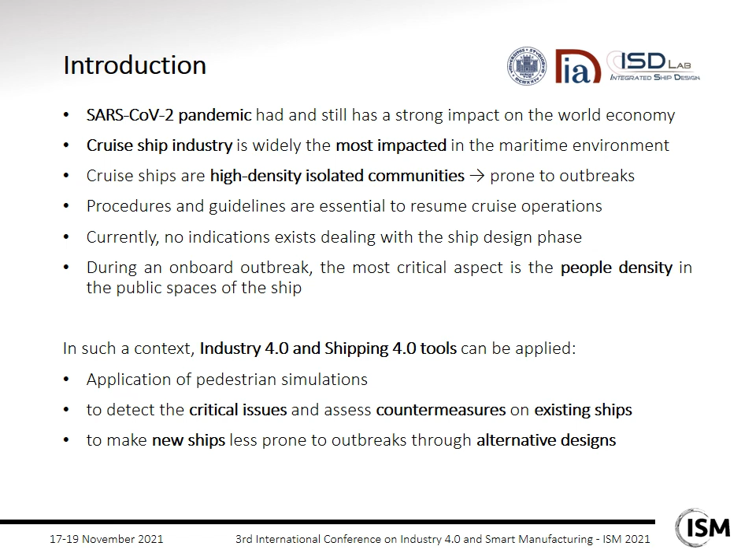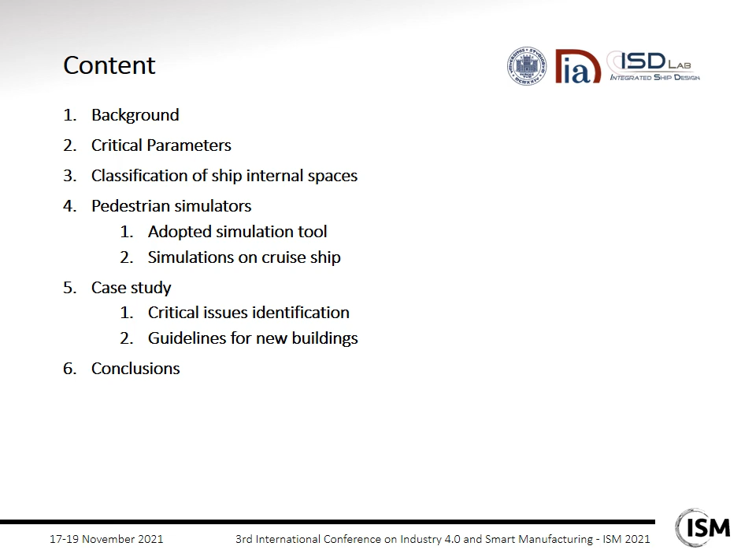This presentation will start from the background represented by current guidelines for cruise operations, then critical parameters affecting an onboard outbreak will be presented and used to define a classification of ship internal spaces. Then the pedestrian simulation tool will be introduced, as well as the process for its usage in the maritime environment. Finally, the process will be applied on a large cruise vessel, gaining some conclusions.

After the no-sail order, national and international organizations immediately started the development of guidelines for a safe recovery of cruise operations. Measures can be classified into two main categories: pre-cruise preventive measures and onboard measures.

The pre-cruise preventive measures are applied before ship departure. First, a risk assessment should be carried out and the preventive measures should be customized according to the current pandemic situation and passenger origin. It might be necessary to reduce the ship capacity and to arrange a segregated quarantine area.

The crew should be trained considering the new procedures and regulations applied on board. Crew should be divided according to their mansion and risk level of exposure to the virus. All the persons engaged in international voyages should be informed about the preventive measures and consent to the health status monitoring. Finally, the access on board should be limited.

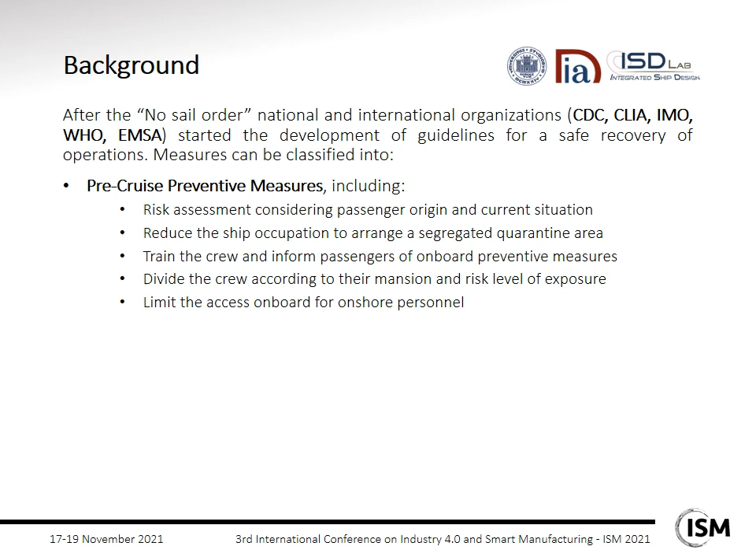The onboard preventive measures and outbreak control include social distancing, public space management, cleaning and sanitizing, management of air conditioning systems, management, preparation and serving of food, use of personal protective equipment, and managing of a suspected case.

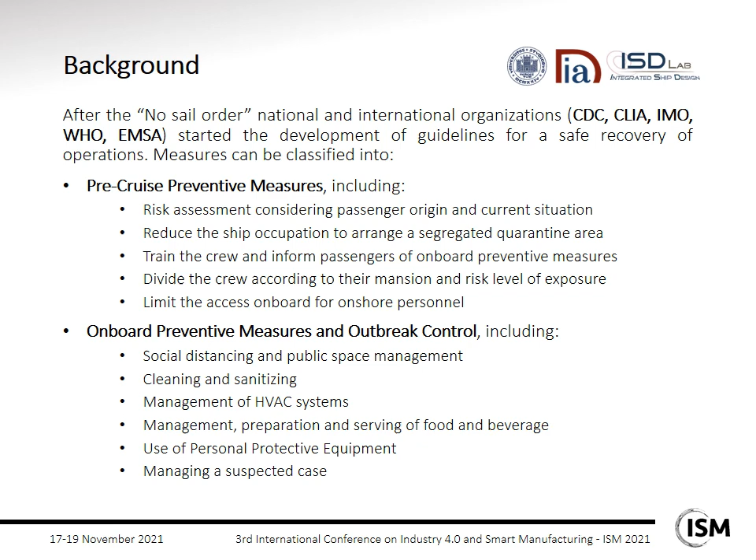COVID infection can spread on board in three main ways: direct contact with persons, contact with infected surfaces, and air conditioning systems, although this last mode has been questioned by some recent studies. According to recent experience and the recommendations, the most important parameters that can foster an outbreak on a passenger vessel are the following. First, the density of persons. In fact, overcrowding is the main source of direct contact.

So, the American CDC prescribed a minimum distance among persons equal to 1.83 meters. It leads to a maximum allowable density of 0.38 persons per square meter. The second parameter is proximity, which considers the type of activity carried out within a specific internal space. For instance, while eating, you cannot wear masks, and this increases the infection risk due to proximity.

Then, there is aggregation, which accounts for the number of persons involved in an activity and their contact level. For instance, aggregation in cabins or shops will be considerably smaller than in a swimming pool or in a theater. The layout of internal spaces also has an influence on outbreaks, since it changes the personal behavior and movements between different ship's areas. It is designed according to several safety criteria, considering evacuation, firefighting, but currently not outbreak control.

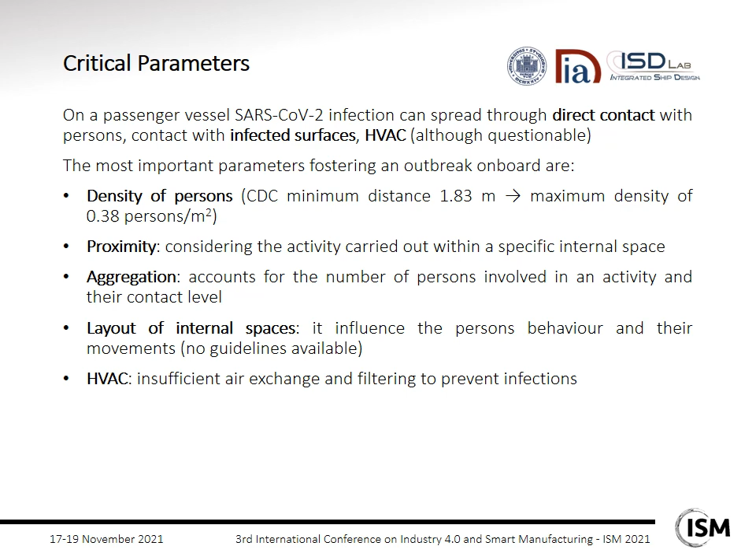Considering the critical parameters, here a classification of ship internal spaces has been proposed. 3 levels have been defined: low exposure risk, highlighted by green color, medium exposure risk in yellow, high exposure risk in red. The parameters driving to this classification are summarized in the table. In the low-risk areas, there is no frequent interaction among passengers and between passengers and crew. Therefore, low-risk areas are mainly identified as stairs, corridors, and cabins.

Medium-risk areas differ from the low-risk ones mainly due to the higher density, proximity, and/or aggregation. Hence, the main spaces classified so are public spaces such as restaurants, bars, casinos, theaters, then service spaces, lobbies, restrooms, and elevators.

Finally, high-risk areas are the ones where interaction with suspected or positive cases occurs. In normal operations, only the medical zone is classified this way, but during an outbreak it might be insufficient, and an additional quarantine area should be fitted and segregated from the rest of the ship. This classification is important in order to apply the proper countermeasures in different parts of the ship, which impact also the setup of pedestrian simulations.

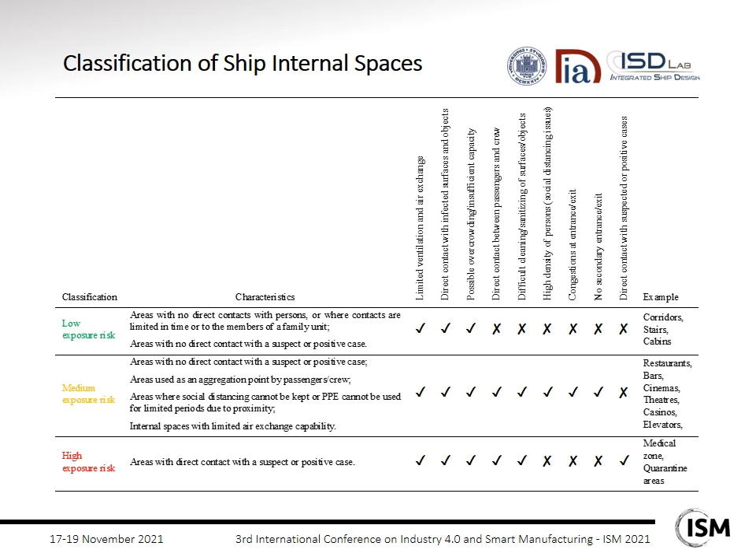Simulation is one of the key enabling technologies in the framework of Industry 4.0. In this work, Legion Pedestrian Simulation tool has been applied to the maritime environment. Legion has been developed for the infrastructure design to simulate the movements of persons inside limited spaces, such as stadiums, squares, city centers, expos, and so on.

It is based on an intelligent agent approach to modeling pedestrian behavior. Simulations are carried out within microscopic models defined with CAD tools. Models include obstacles, ingress and egress points. A so-called origin-destination matrix defines the start and the final point for each agent, which moves between them according to the minimum effort principle, while interacting with the environment and with the other agents.

Agent actions and paths can be customized by behavioral models. Typical examples are the definition of waiting spots and the definitions of specific paths. Considering outbreaks problem, pedestrian simulation can provide very useful information, such as maximum cumulative density of the crowd, level of service of the analyzed space, mean velocity and time of ingress-egress. In Legion, it is also possible to evaluate the maximum capacity of a space in order to assure social distancing.

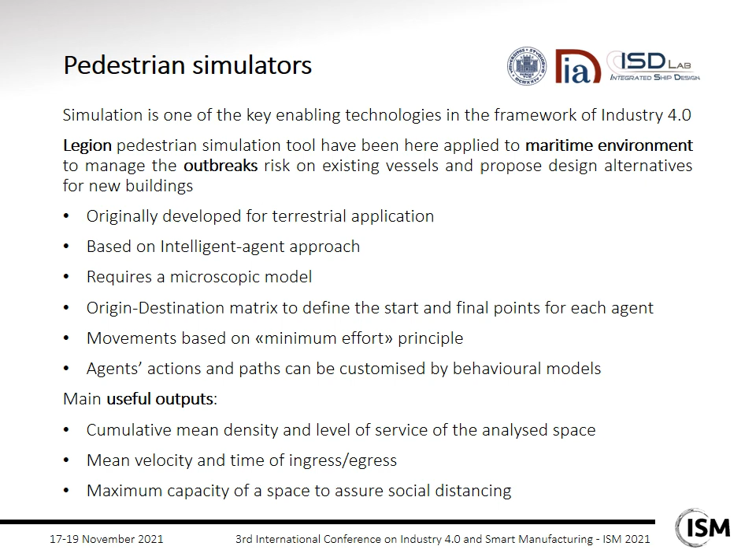In detail, person profiles can be defined according to the standard population defined by IMO for evacuation simulations. OD matrices should be also built up. Origin can be defined according to the day case described in the FSS code issued by IMO. Details can be retrieved by the escape plan of the ship. Destinations are more difficult to define, especially in the design phase, so specific assumptions are required, possibly based on the shipowner's previous experience.

Additional actions or specific paths can be defined for a specific agent or group to better reproduce the activities of the people on board. Then, the simulations can be carried out and the results analyzed. If they do not highlight critical issues, the process can be stopped. Otherwise, alternative measures based on different simulation controls or alternative layouts can be again simulated until a satisfactory result is obtained.

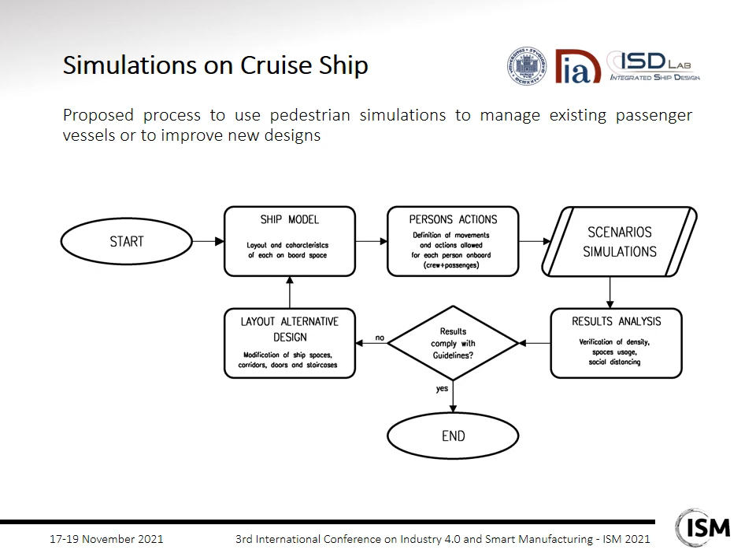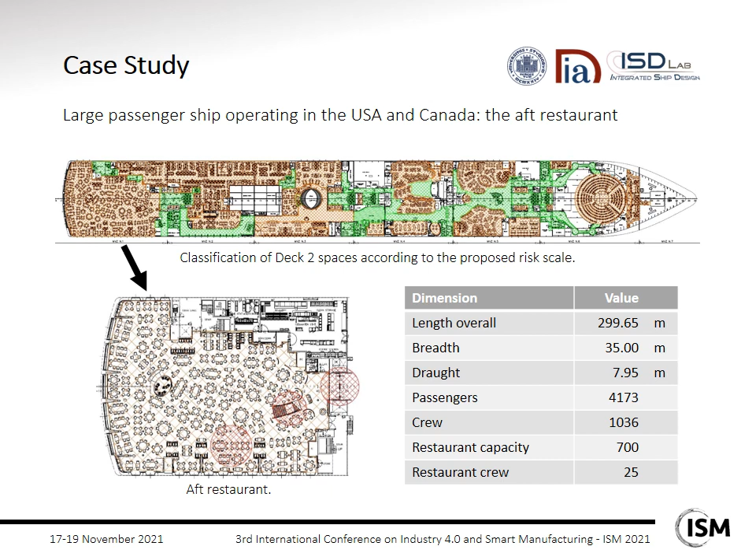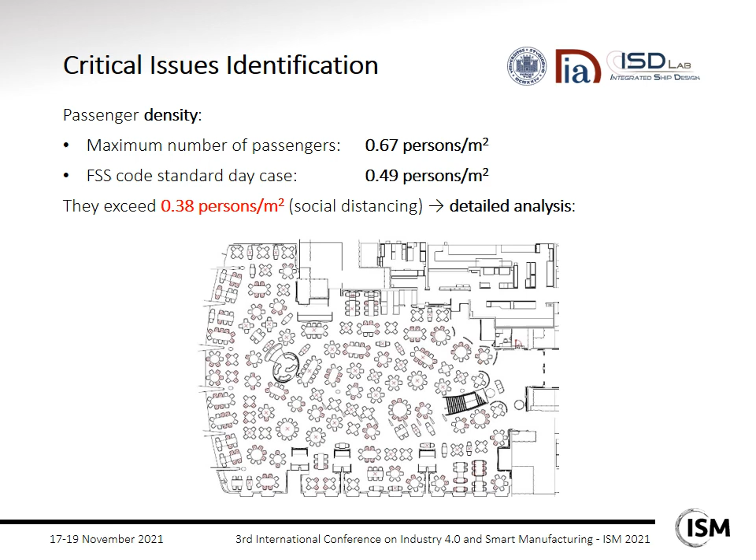The first issue identified is related to passenger density. Applying the maximum number of passengers, as well as the one related to FSS code, the density exceeds the limits issued by CDC. Moreover, to reduce the proximity risk, social distancing should be applied. So, all the seats exceeding 4 per table have been removed. Besides, all the seats located at less than 1.83 meters have been removed as well. It results in a strong capacity reduction. The maximum number of passengers is now 287 instead of the initial 700.

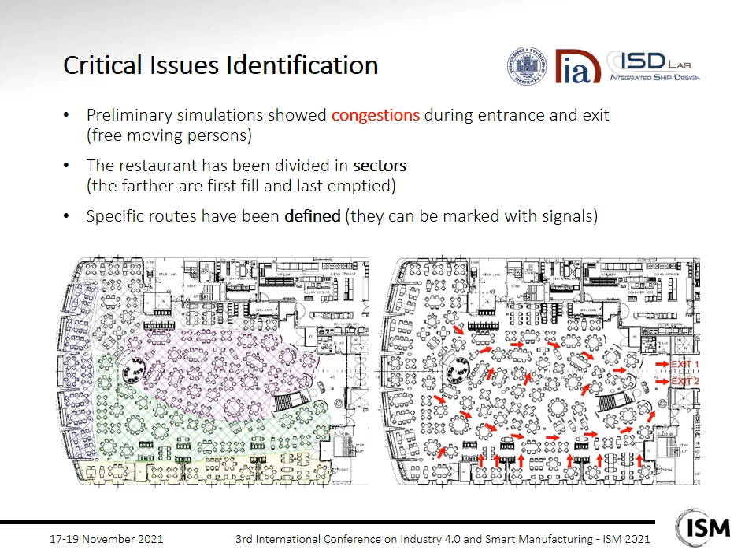Then, the most critical phases have been analyzed. They are the entrance and exit of passengers in and from the restaurant. Some preliminary simulations carried out with free-moving agents highlighted an unacceptable maximum cumulative density in several spots. So, we tested an alternative solution. The restaurant has been divided into sectors. Passengers are supposed to book the restaurant place and to fill first the farther sectors. At exit, the order is reverted. Moreover, agents are forced to follow specific paths that can be marked with signals. The process has been shaped to last no more than 10 minutes.

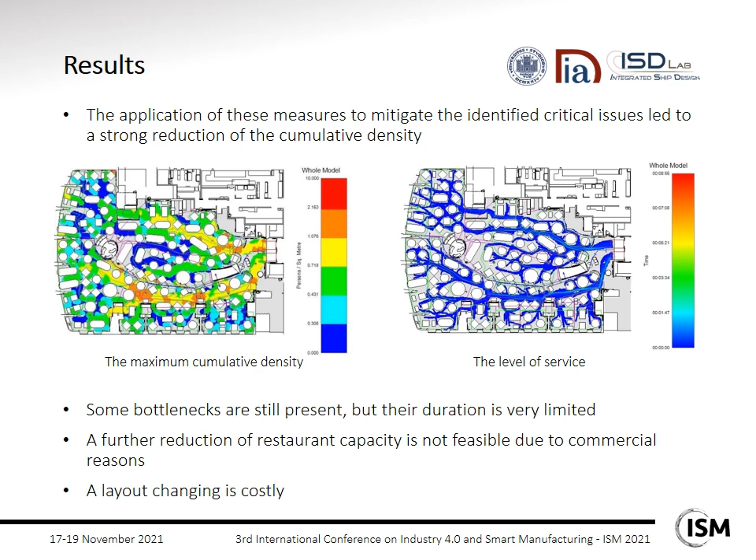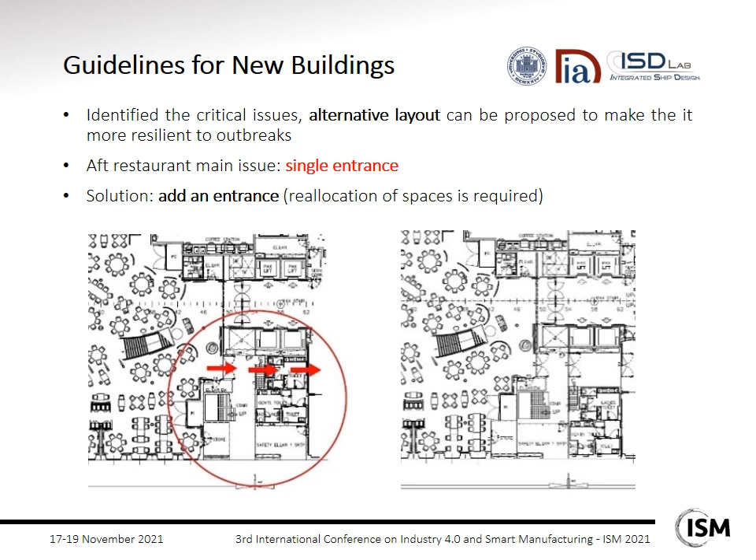In conclusion, simulations have been proved once again to be a powerful instrument applicable even for preventing and controlling outbreaks on board. This work shows how pedestrian simulation can be used to identify the critical issues in existing vessels and help to define customized mitigation procedures. The results of this analysis can guide also the ship design team to review the ship general arrangement when it might foster an outbreak.

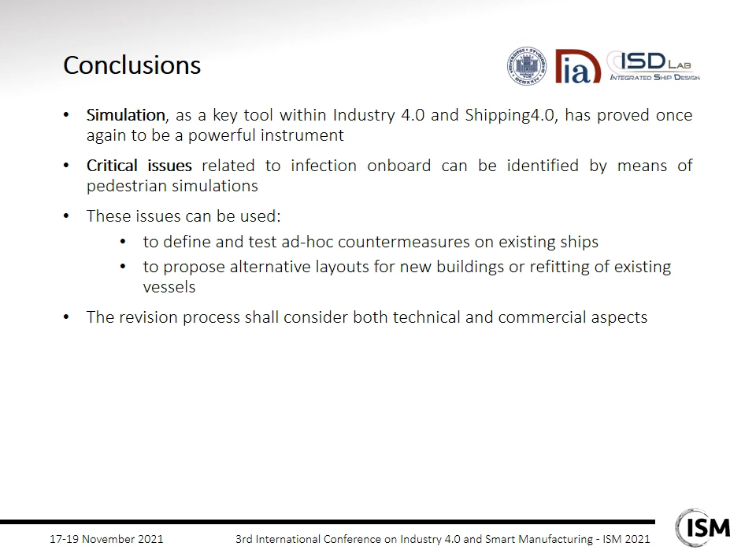Changes can reduce congestion occurrence, however, they have a cost that should be considered during ship design. In general, layouts designed to be resilient to outbreaks are more space-consuming, thus, they can affect the economic performance of the ship. It means that, without proper mandatory rules, they are not easily applicable. Thank you for your kind attention.